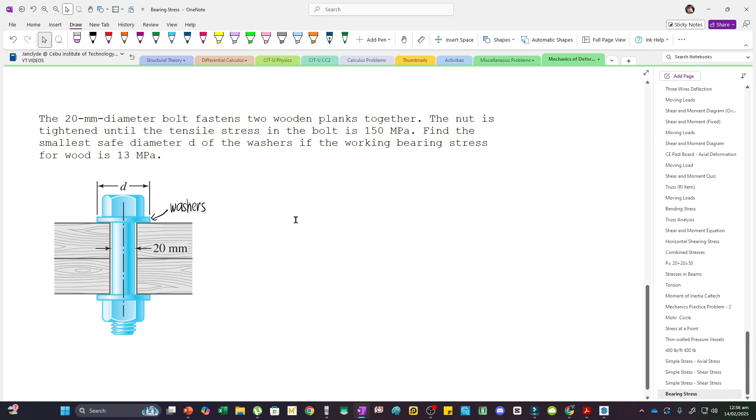So, sigma B equals 13 MPa, the working bearing stress for wood. Now, we can cut the bolt like this, and let's try to analyze the tensile force, since we have the tensile stress. So, analyzing one side of the bolt, this is what remains.

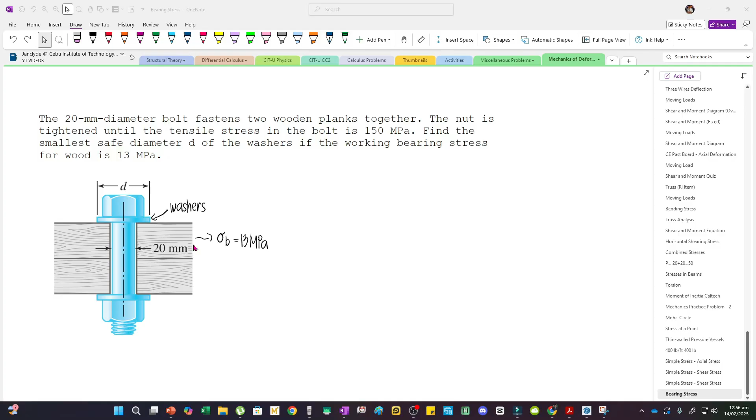So, we have a tensile force that develops there. This happened since the nut is tightened. So, this is the nut. So, we have a tensile force, and the tensile stress is equal to 150 MPa.

So, this tensile force acts over the cross-section of the bolt, which is just equal to pi d squared divided by 4, the area perpendicular to tension. So, 150 MPa is equal to the tensile force divided by the area, pi over 4 times diameter of 20 mm squared. So, T is equal to 150 times the area, pi over 4 times 20 squared.

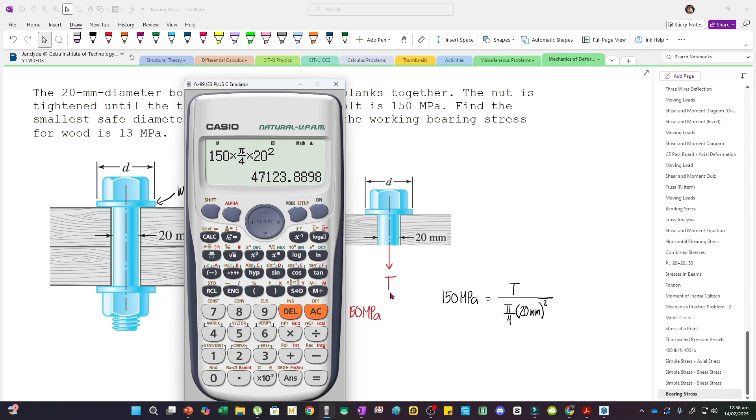Now, once you know the tensile force, we can solve for the smallest safe diameter D of the washers given the bearing stress. The bearing stress involves contact pressure. If you look at the washer, it is in contact with this portion only.

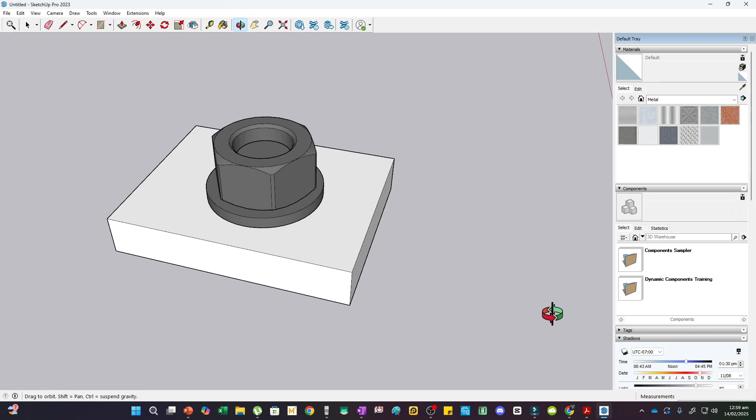I modeled this in SketchUp. Here it is. Again, this is the bolt, and we are pulling it once the nut is tightened. So what happens is, this is the washer, in contact with our plate. If I hide that, only this portion of the washer is in contact.

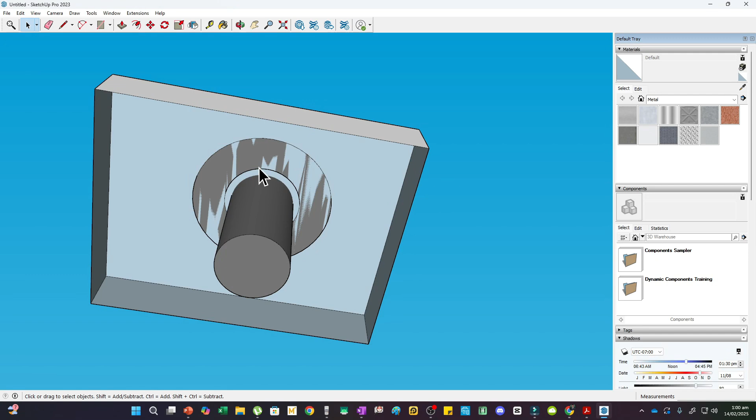So essentially, this is the full diameter of the washer, and we subtract this amount. The washer has an allowance, but in our problem, we assume the diameter reaches the full extent, flush with the bolt. So essentially, it's an outer circle with D as the diameter minus an inner circle with 20 mm as the diameter. Outer minus inner, but disregard the allowance. Let's unhide it now.

Now, we would have the bearing stress for wood equal to 13 MPa, based on bearing. So, we have 13 MPa. Stress equals force divided by area. Our force is just 47123.89, since that force is the reason contact pressure develops at the junction point of the plank and the washer.

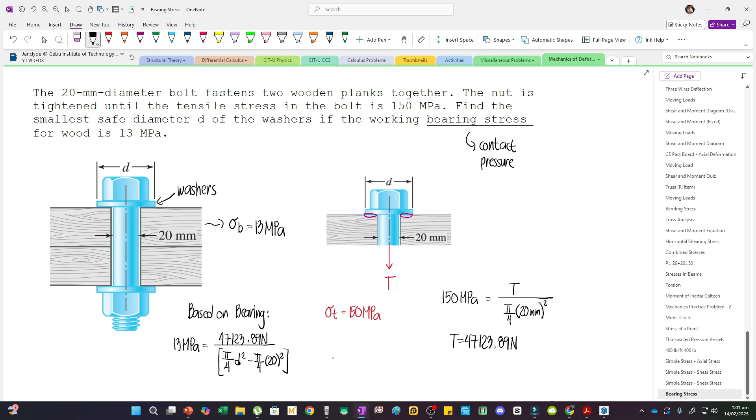So, 47123.89 newtons. Our area is pi over 4 times d squared, the area of the washer, minus the area of the bolt, like in top view. So, in parenthesis, minus pi over 4 times 20 squared. This is outer area minus inner area.

So, solving for D: multiply both sides by 13 so the unknowns are all in the numerator. Pi over 4, then we join the d squared term since pi over 4 is common, giving d squared minus 20 squared, equals 47123.89. Solving for the diameter of the washer, we get 70.819 or approximately 70.82.